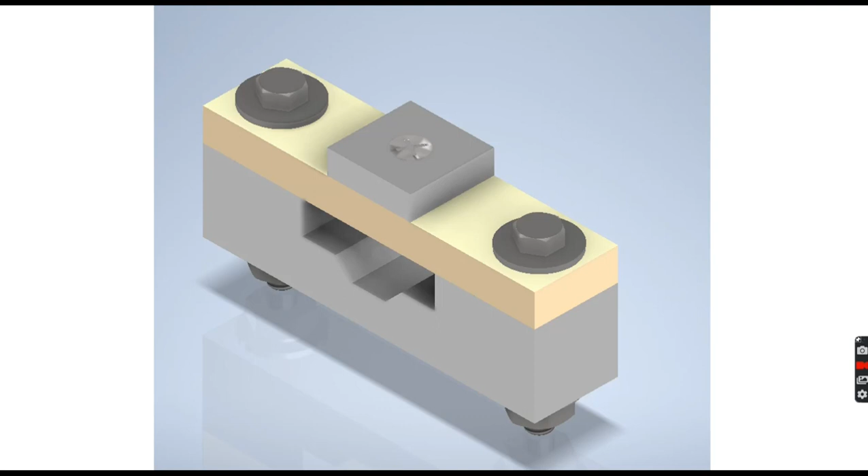So I'm going to start off. Even though when you look at this there are going to be holes here, a hole in there, and a hole in the middle somewhere, I'm going to let Inventor figure that out for me.

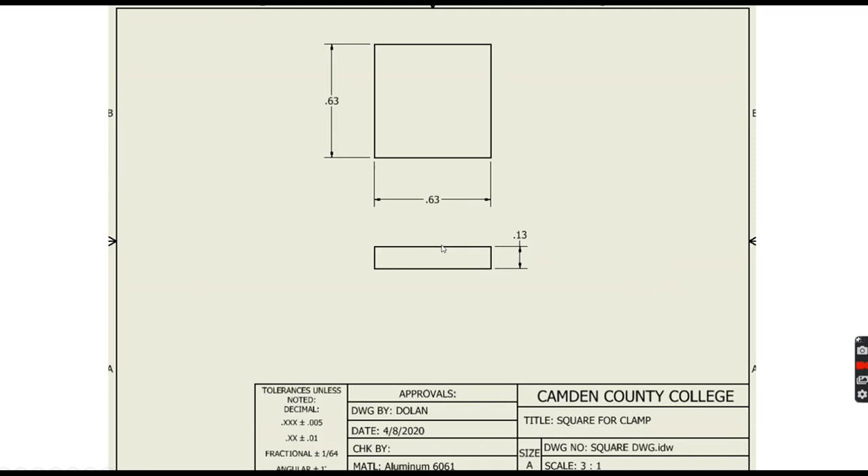So I've drawn the top plate for this. If you'd like to follow along, you could do this, and then that little square at the top, and the base. So these are the parts that I'm going to be using.

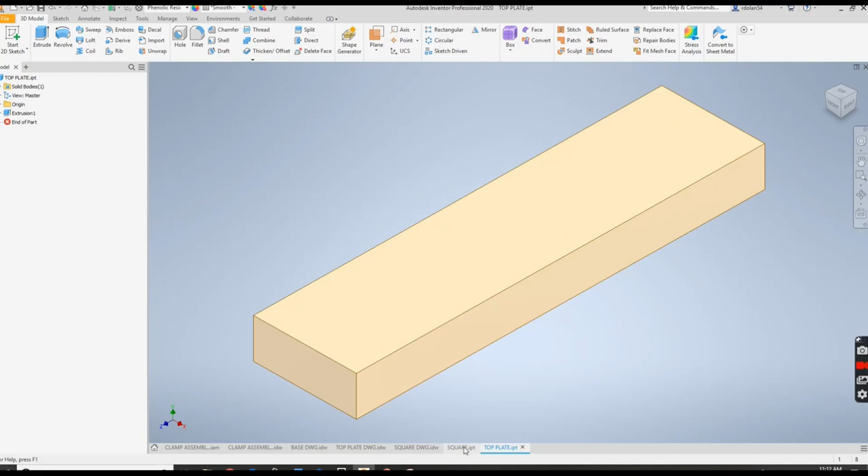Alright, so let's go into Inventor. Here are my parts: the top plate, the square. Now I didn't put the base here for a specific reason. I'm going to show you something later.

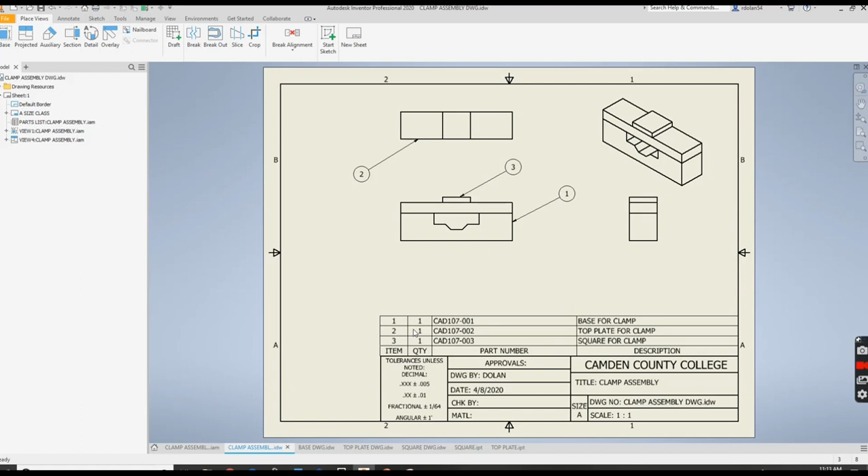I've made a drawing of the square, a drawing of the top plate, a drawing of the base, and a drawing of the assembly. I've put a little table here and some balloons, and I've already uploaded or placed the base, the top plate, and the square, and I've constrained them.

So like I said, here is our assembly, here are our three pieces all constrained. Now the first thing I want to do is put a number 6 screw in here with the proper washers and nut.

I can do this a couple of different ways. I can put the holes in here myself, but I'm going to let Inventor put the holes in here instead. So what I'm going to do is...

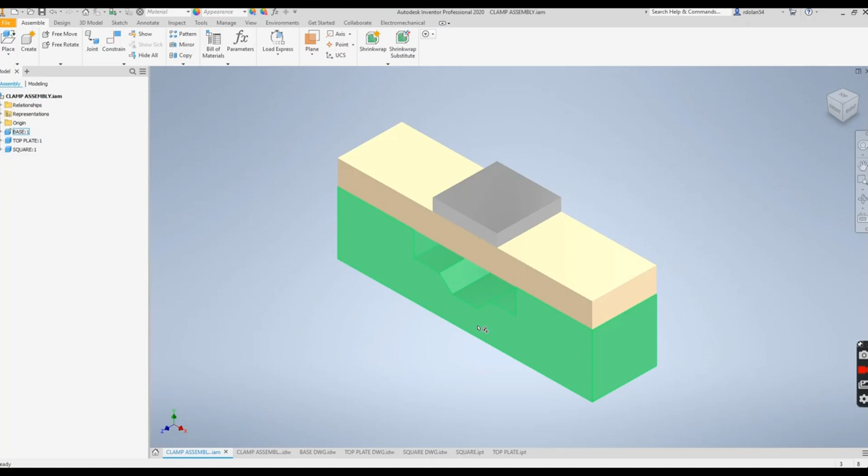close my parts here. The reason I'm doing that is that when I go to edit this, if the drawing's open, it will just hop over there. I want to show you that you can edit the part while you're in the assembly.

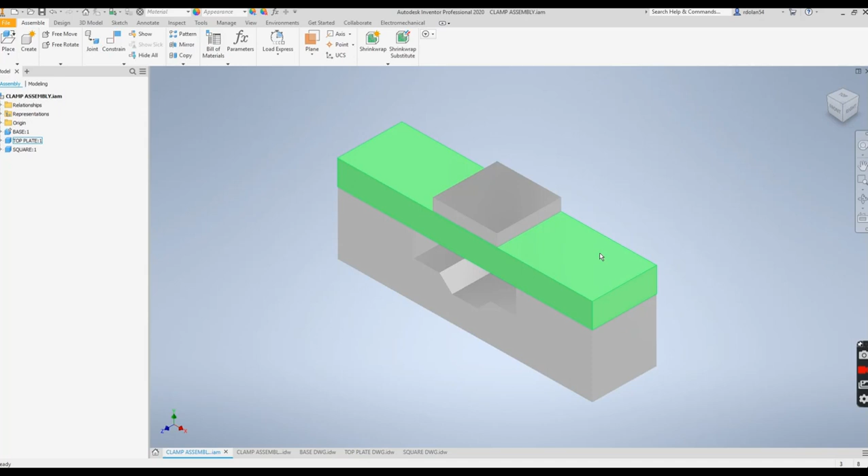So I want to put the bolts through this part, so I'm going to double click on it. It puts the focus on that part. Now what I'm going to do is start a new sketch on that part.

I'm just going to put some points here for reference, and it will allow me to put our bolts in relation to those points. So I'm going to put a point here, and I'll go along the center, put it right about there, and put one here.

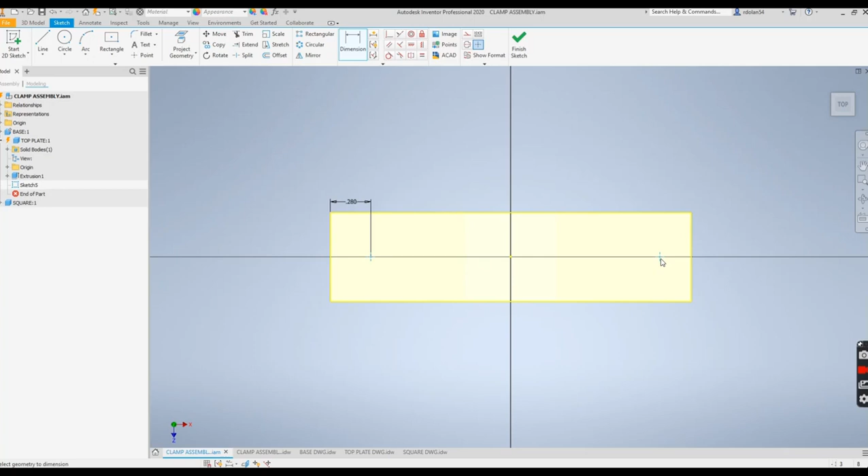I'll dimension those: from this point to there is going to be 0.280, and then between those two is going to be 1.94. Then I'm going to finish the sketch.

Now what I do is go up here and hit return to go back into my drawing. So I'm going to go up here to design — remember we looked, if you saw that video, on creating shafts and gears — but now I'm going to make a bolted connection.

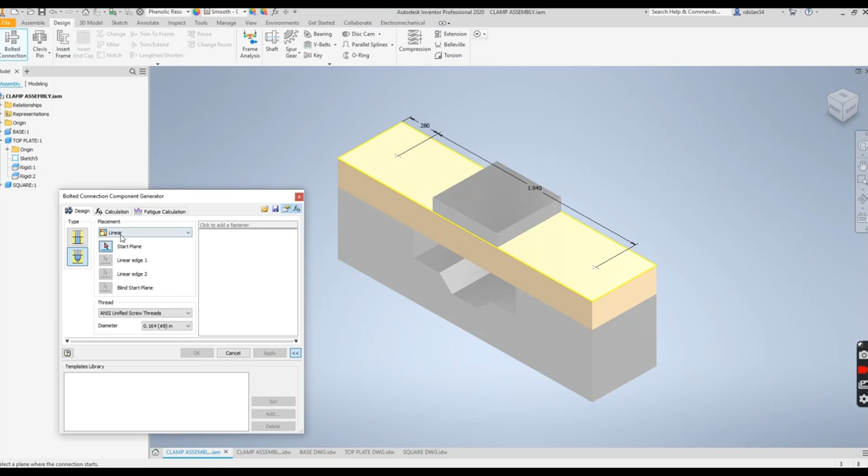If I wanted to, I could just pick linear, and give the dimension from this point to that point and from that point to that point. Or I could do concentric — if I have some kind of circle, I can make it concentric to that circle. I can do it with a point, which is what we're going to do, or I could line it up with a hole that already exists in there. So I'm going to do it on a point.

Now we have two types: we're going to go through everything, or we're going to go into a blind hole. The first one we're going to do are these two here, and we're going to go through everything. Later we're going to go through a blind hole, and we're going to do that linearly, from there.

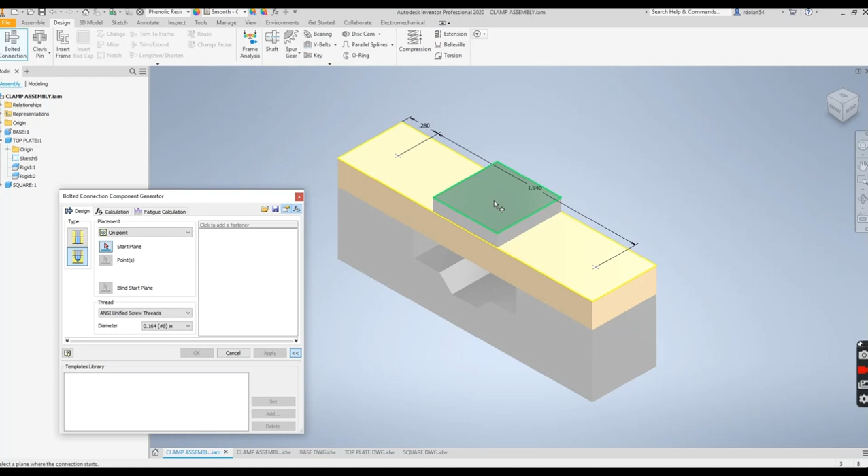So I'm going to do it from point. Okay, the first thing it wants is a start plane. The start plane is where we're going to start that process, and it's right on that face. Inventor is smart enough to know that you want it to go down, not up.

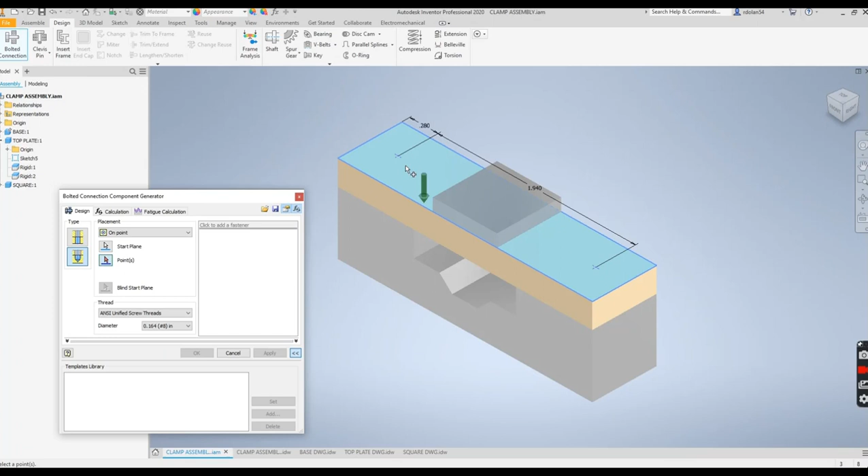Now I'm going to pick the points. So I have a point there. Notice again it moved to down. I go back to points. I click on this point.

Now I put what size hole I want. So I want a number 6. So here's a number 6, which is a 138 diameter hole.

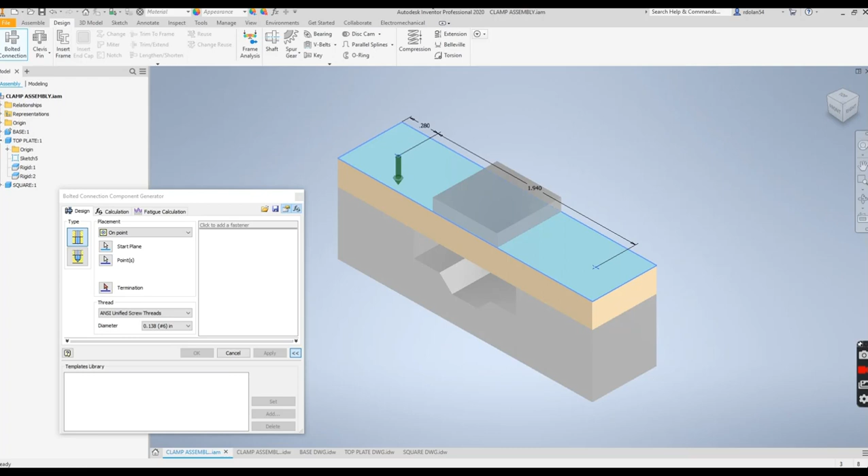All right, once I have that, I tell it... whoops, I'm in blind, so I have to go here. I need to go to termination, and I'm going to tell it where it's going to end. I'm going to go here and click on the bottom, termination.

You can see that it already put the holes in there. So I'm all ready to start putting my hardware, and you'll see that I have a hole in the first piece and a hole in the second piece.

Now you'll see that when I do that, again, here are my two pieces. This is the hole that's put in there. Like I said, the diameter of the thread is 138, so it's going to put a hole in here of 150. So here we can click on a fastener.

So we're going to add a fastener. It's going to pop up and give us some categories of things we want. Here are regular bolts, we also have hex head bolts, we have socket heads. We're going to go to hex head bolts, and we are going to pick a plain hex head machine screw.

You'll notice that it even figured out the length that it should be, and it already did that. You'll see the outline of the hex head here. Now you'll see that again, here are my two pieces.

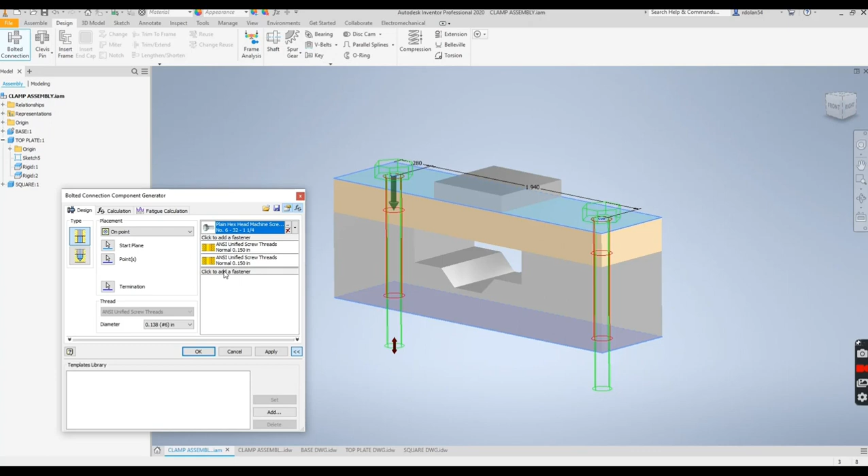Now I can put another fastener up top here, which would be up on this surface, or I could put one down the bottom, which would be under this surface. I'm going to put a flat washer here, so I'm going to pick add a fastener.

Now again, it's so smart it knows that we put a hex head there, and it's giving us washers. So all I want is a plain washer. So I have the hex head, the washer, the bolt coming through here.

Now I'm going to add down the bottom. So I'm going to pick add a fastener. Again, I'm going to pick a flat washer. I'm going to go down again and pick a fastener.

Now it thinks, well, you should be done, you should put a nut on there, but I want a lock washer. So I'm going to hit down here and go back to washers, and I'm just going to pick a regular spring lock washer. Now I've put two washers there.

I'm going to add a fastener. Now I'm going to put my machine screw nut there, my hex machine screw.

Now while you're doing these, if you are figuring out all the forces and you're doing something like a stress analysis, you can figure out these and whether or not it's going to meet it or not, and then you can change it accordingly. Also, you can do fatigue calculations on here, for when the fatigue is going to give up.

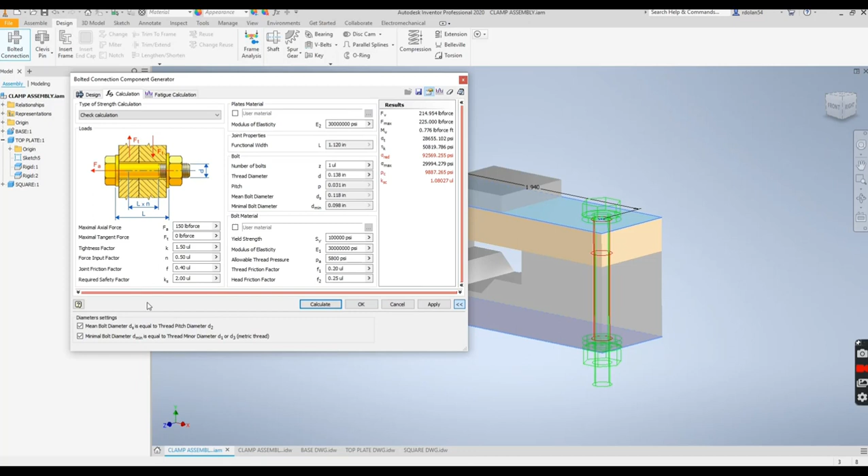So I can pick calculate, and it should be done. And I go to design here. Now I can change anything I want. I can add another template library if I have one. But I'm going to pick OK.

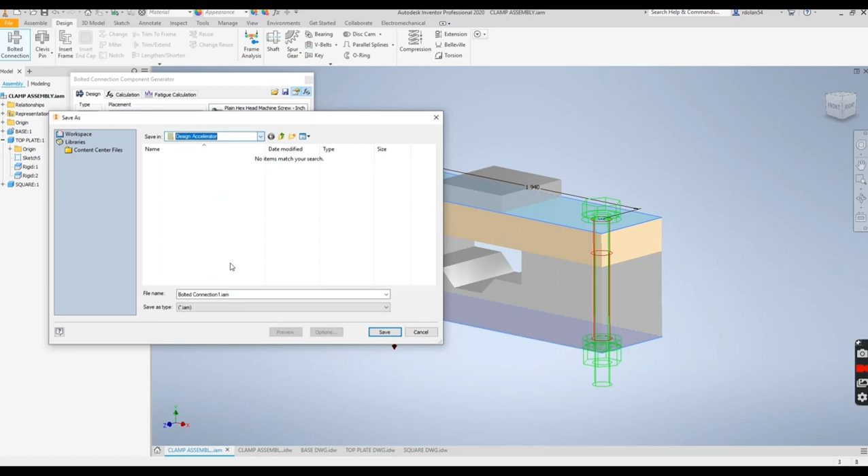Now it's going to make a subassembly, called bolted connection. Now I can change where it puts that. It automatically puts it in Design Accelerator, but I'm going to take and I'm going to put it... I guess Design Accelerator is fine. And there's bolted connection. I'm going to pick Save. I'll pick OK.

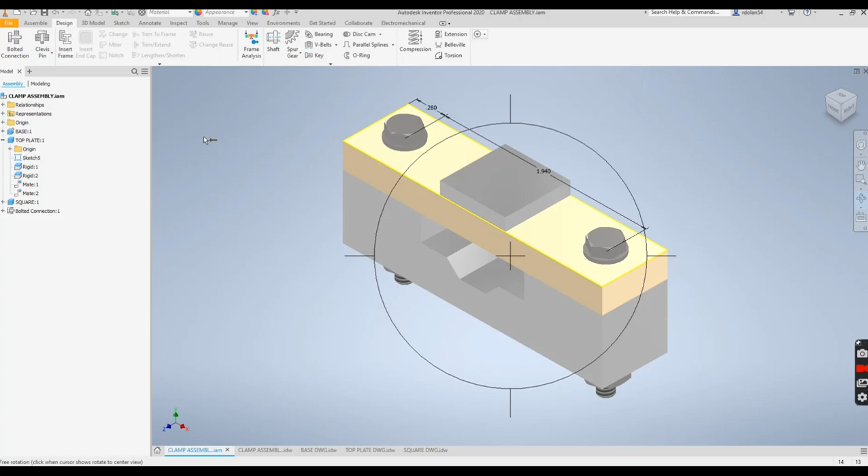And there is our completed bolt assembly. Now if I want to get rid of those dimensions, I can just go over here to that sketch. Number 5 was the one we put that in, and then just change the visibility.

Okay, now one of the impressive things about this, one of the things that I really like, is that once I have this design made, if I go to the base drawing, you'll see that it put the holes there automatically.

So I could go to annotate, and I can put some dimensions on there, put some center lines here. I'll leave these, I thought I put center lines there.

Then I'm going to dimension it, from there to that center line, and then from center line to center line. Okay, I can save that if I want.

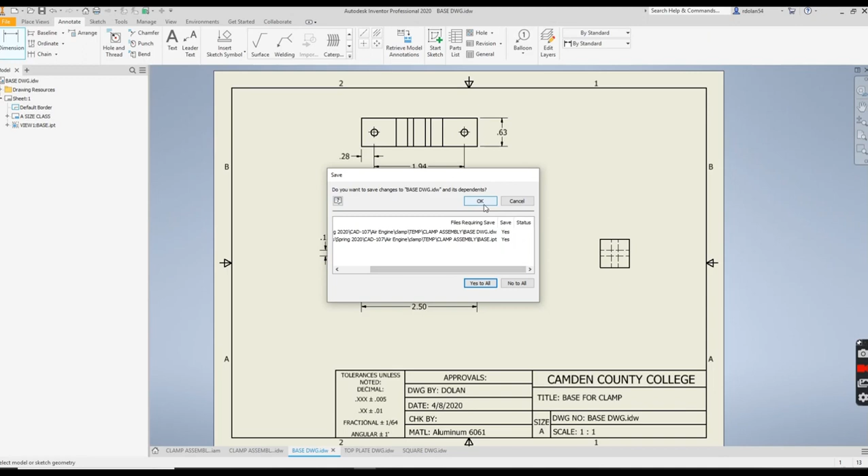Now again, it wants to know if I want to change dependencies, and I do. Here is my top plate drawing, and you'll see that that has those holes in there as well. I'm just going to put those in there and dimension those as well.

I'll go from here to the center, right there, then center to center. Whoops, looks like I missed that one. Center to center, drag that up here, hit escape, and I'll just drag this guy up there a little bit.

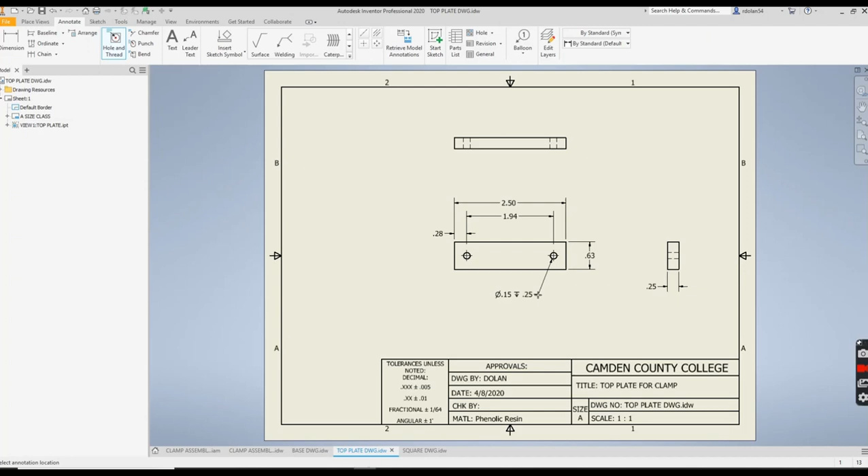Again, you notice that it put the holes here, and it put them there. Now I can go here, and I have to go back and do it on the other one as well. So I'll click there, and there is the .150. Here's my base drawing, I can go here and add it there.

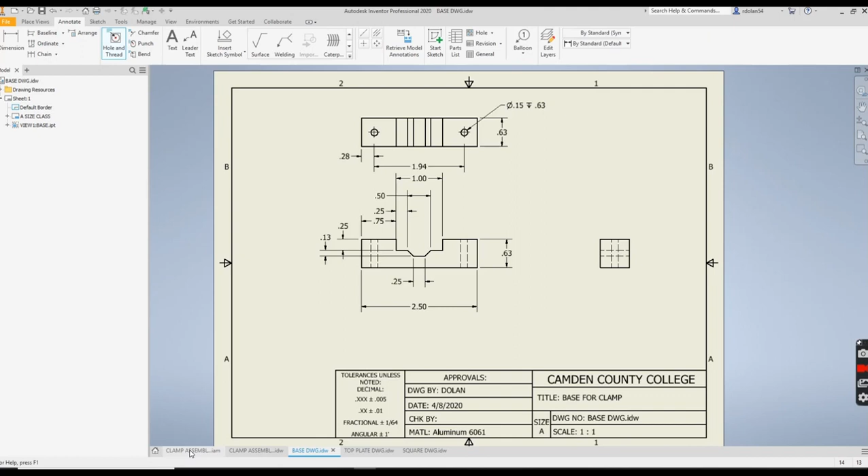Now what I wanted to show you is, here is my clamp assembly. I'm going to save it, say yes to all the dependencies. Now if I go and open the base drawing, which was not there, you can already see the holes have been added.

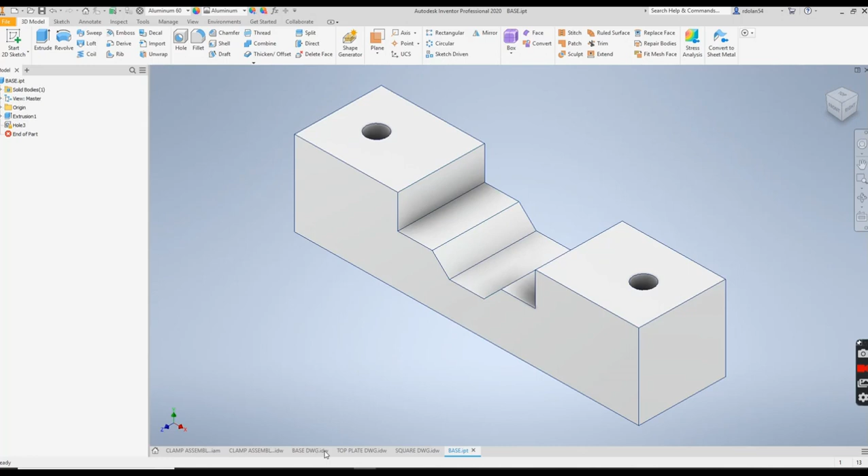If I go to my clamp assembly, you'll see that before I had three parts here, now it added all of these in. So it automatically added those to my drawing.

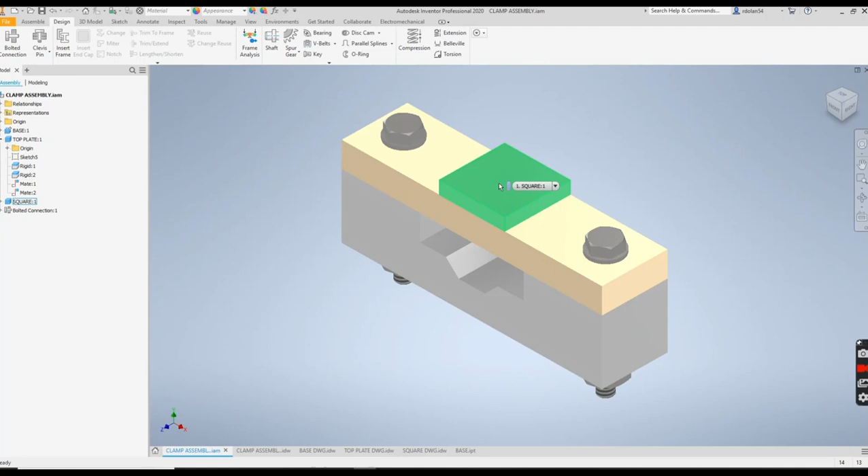Now let's take a look at putting in a flathead screw. So I'm going to go up here to bolted connection again. I'm going to make sure I pick that I have a blind hole in here. Now this time I'm going to pick linear, and I'm going to pick this part here.

Whoops, I picked that edge, and that's not what I want to do - the linear edge. Well, let me cancel that and go back in here.

So I'm going to go here, and I'm going to go to linear. The start plane is here again. Make sure that I am here with the blind hole, and I'm going to go to linear edge. I'm going to pick this linear edge, and that's more like it.

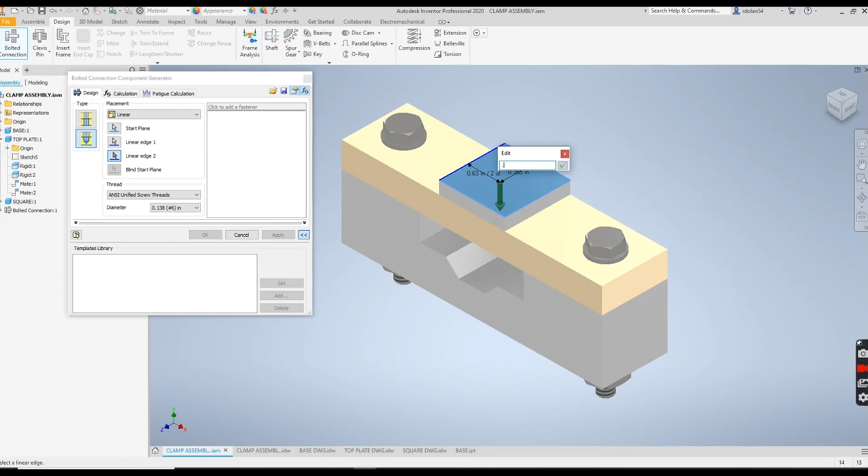It wants to know how far it is. That whole thing is 0.63, so I'll put divided by 2. Then my second linear edge is here, and I'll do the same thing, 0.63 divided by 2.

Now it has my spot where I'm ready for that. So now it wants to know the blind start plane. I'm going to pick the blind start plane, and that is going to be this plane right here. It needs to know the size, and maybe I'll change this to a number 8, so I'll put a number 8 there. I'm going to click add on a fastener.

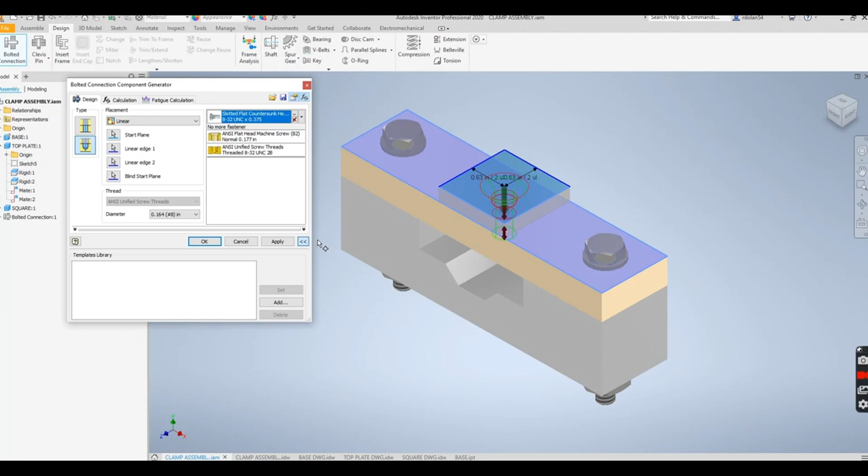Now I'm going to go down and I want a countersink bolt. I can put a slotted countersink cap screw, which should be fine. I'm going to pick that. I don't need any washers, and I just pick OK. That's where it's going to put it. I'm going to pick OK again.

Now you see that I have my screw there. If I go down now to my clamp assembly, you'll see that that screw is here.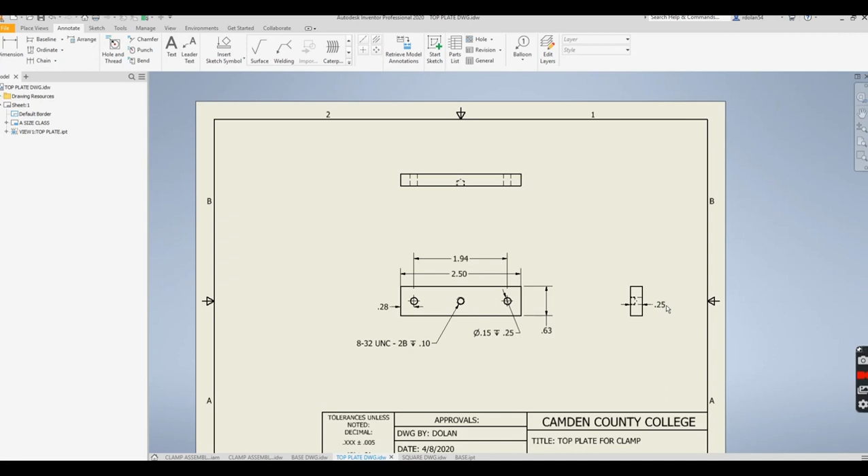I can pick this hole right here. Now this one here did get a little messed up, so I can just take this and move it right down there. Now on the square drawing, same thing. I can go here, let's change this around so that we have the right view, and that's good.

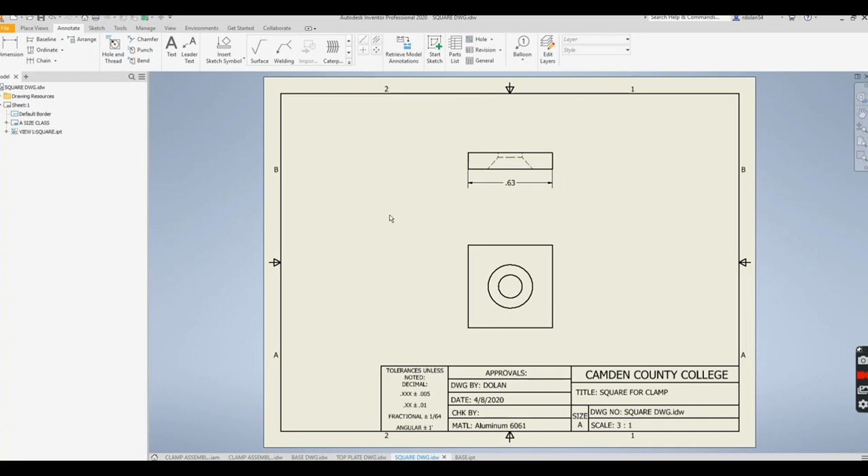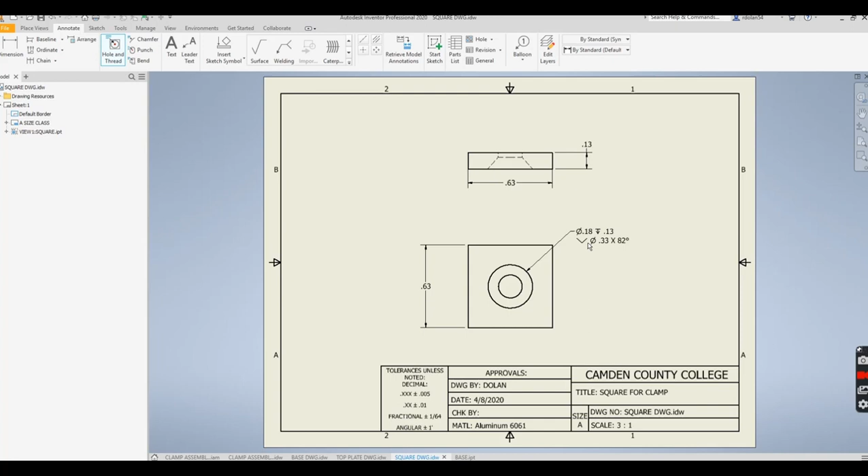Okay, now for some reason our dimension went away, so I'll have to put that one back. I'll put dimension here, thickness here, which I might have left off. And then again, this is going to pick up everything. It tells it it's a 180 diameter, 130 thousandths deep. There is a countersink here that is 0.33 times 82 degrees. So it took care of all of that for us.

Again, back in the clamp assembly drawing, it now put that screw there. There's the screw. Okay, and we're all ready to fix that.

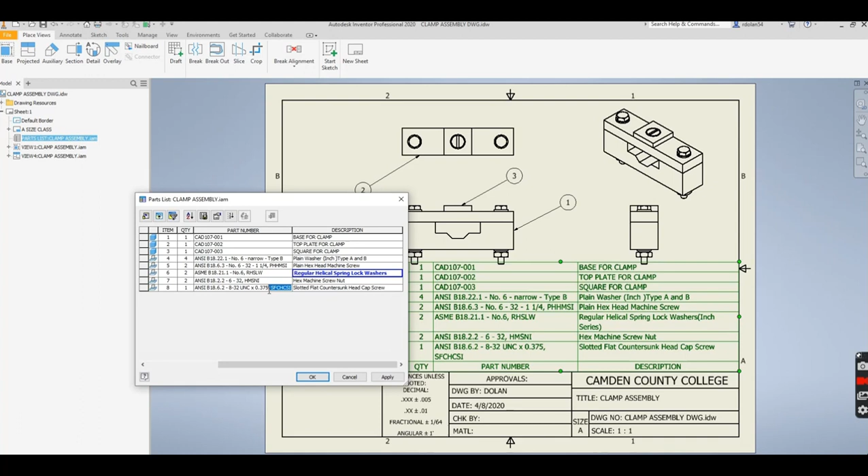So I can fix up my table here a little bit. If I double click on it to go into it, I might want to change some of these so I don't have two rows here. This one here, I don't need to tell it's an inch. Okay, take care of that one. This bottom one here, I don't need this specification here. And I pick OK. Now it's come down to where we can see it better.

Alright, now I just noticed that probably the diameter of these flat washers are too small. They're almost just a little bit bigger than the head of the screw. So I'm going to go back in here and fix that. I'm going to go into my assembly.

You'll see that this whole thing is one object, so I'm going to just highlight it, right click and pick Edit using Design Accelerator. Now again it goes back to where I was. Now if I click on the plain washer, I could go here where the X is and delete it. I go where the three dots are, and that allows me to pick other ones.

That diameter was 312. Maybe I want to make it 562. I'll pick OK. And the third one is this little down arrow here, and if I want to change that component completely, which I don't.

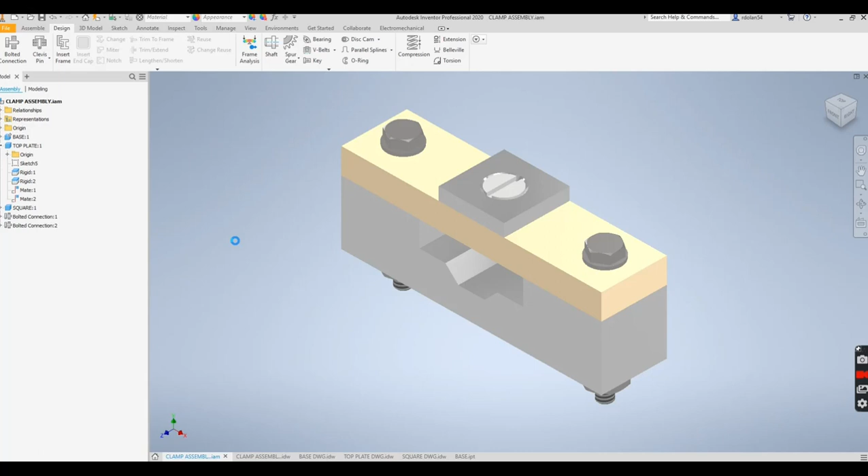So now I want to do the same at the bottom. I'll go to the three dots. I'm going to change this to 562. I'm going to pick OK, pick OK. Now you'll see that I have bigger washers, and you notice that it was updated on my drawing.

And you'll see that if I go here, I want these not to be 6s. I want those to be number 8s. So I'm going to go Edit Design Accelerator again. Here's my machine screw. I'm going to go here.

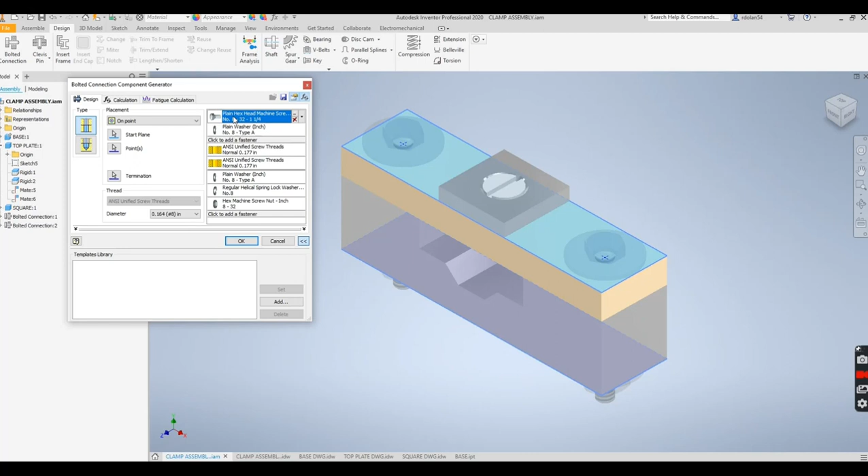Okay, and if I wanted to change the length, I could change the length there. I could change the pitch diameter, the threads, but I don't want to do that. What I want to change is here. I want to go down and make this a number 8. Notice it changed all those to a number 8. I'm going to pick OK.

Okay, and back in my clamp assembly, you'll see that everything has changed to a number 8.

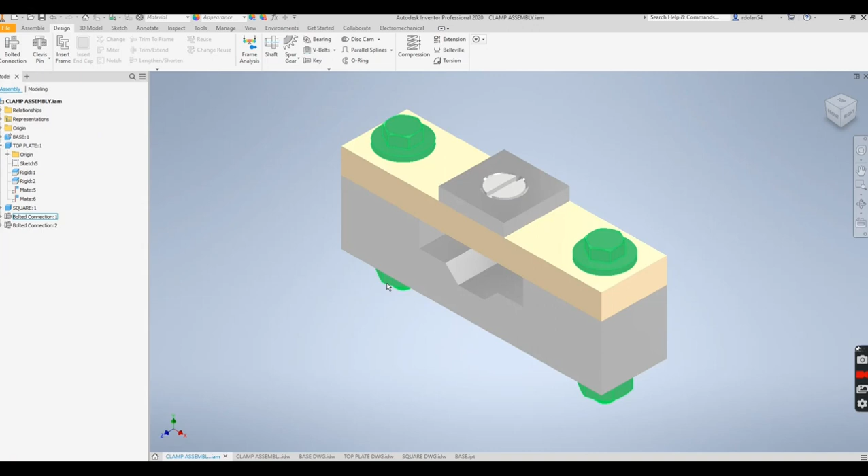Okay, I want to look at this and say, oh, you know what, I want to do this by hand, so I'm going to change these. Instead of having the machine nut, I'm going to make it, I don't know, I'll make it a wing nut. And I'll pick OK.

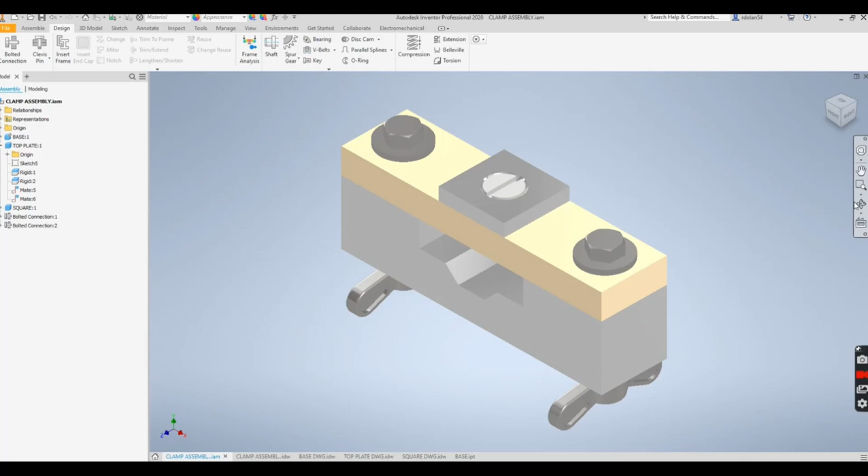Alright, now you'll see that I have wing nuts here. Again, if I go back to my clamp assembly, they have been updated to show the wing nuts. So again, that is a handy feature that we can use in here, and that is it.